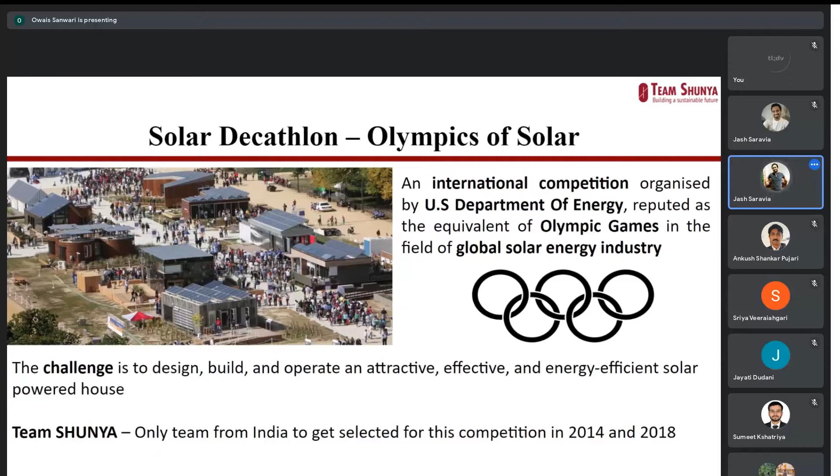Team Shunya has evolved to become a close-knit family of 40 plus students across all departments and courses. The team boasts various technical and non-technical subsystems proficient in innovating and implementing the ideas. Since its birth, the team has participated in international competitions, expos, and conducted various webinars and workshops on sustainable development.

Here we have a brief overview of what the team does during a competition. First, the tech teams employ different software to design, simulate, and analyze the project at every milestone, building it from scratch. The architecture subsystem is responsible for understanding and analyzing resident requirements for design development and analysis, while considering aesthetics.

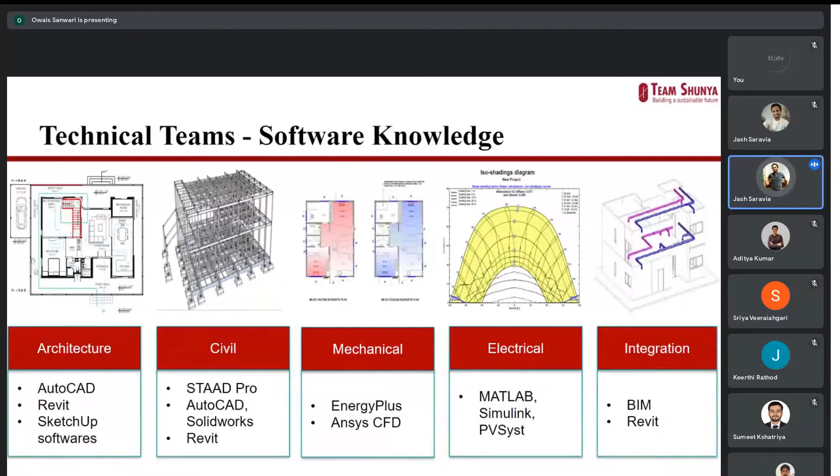It also works on incorporating passive techniques for optimizing energy efficiency into the project plan. The civil subsystem comprises of two internal teams: the structural team, which works on design and safety aspects, and the materials team, which selects efficient materials for the houses.

The mechanical subsystem maintains and optimizes the thermal comfort, regulates heat, airflow, ventilation, air conditioning, and plumbing system of the house. The electrical subsystem deals with electrical requirements of the house, such as energy demands, wiring, and home appliances. It is also responsible for designing the PV system to be deployed for powering the house.

Finally, during integration, a simulation of various subsystems is done using the mentioned software to avoid any conflict while installing the systems on site. Once we are done with the integration, the team undergoes complete construction and safety training to ensure it is ready to build the house.

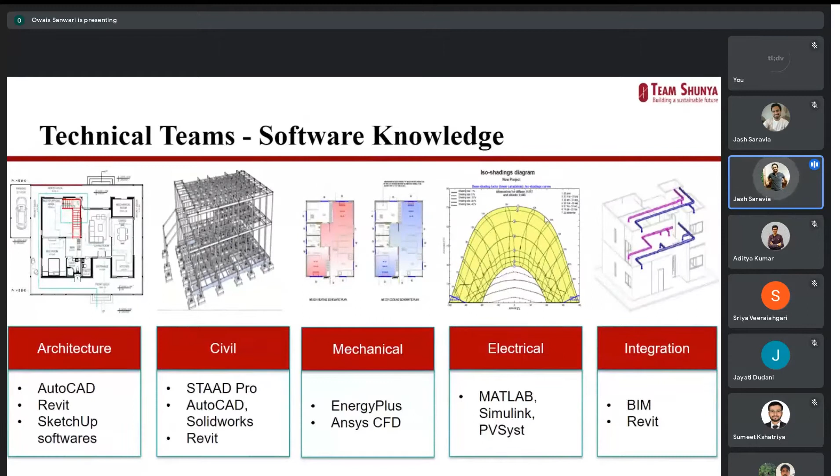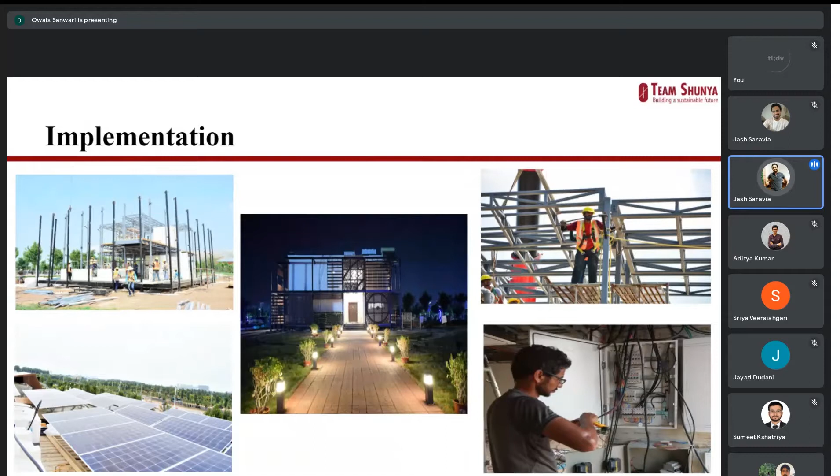Here comes the implementation, which is the best part of the project, as all students are involved in the construction process. All the designs are put to life by the students themselves. All the team members are enthusiastic to learn and actively participate in the project building.

The marketing and communication team carries out many activities throughout the year. We participate in various knowledge exchange programs and have interactions with eminent industries. Moreover, we organize various events like webinars and workshops to increase awareness about sustainability and energy efficient technologies, and increase our outreach through social media pages.

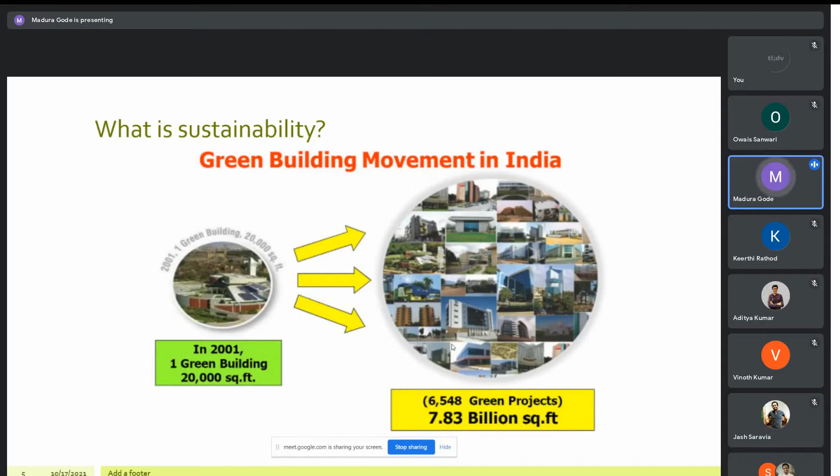Why do we need sustainability? Why do we need a sustainable development?

So first is the demands. Though there's a population rise, that means we need more infrastructure, more housing, and when there is more housing, we need more corridors, more public transport, metros, ports, more infrastructure, more commercial spaces. So that's how the demand is increasing.

But at the same time, what are we losing right now? It's the air quality, the land, the water. We have so few water resources right now. The groundwater table has gone so down that in the next 10 years we need to really search for some option to get at least fresh water to drink.

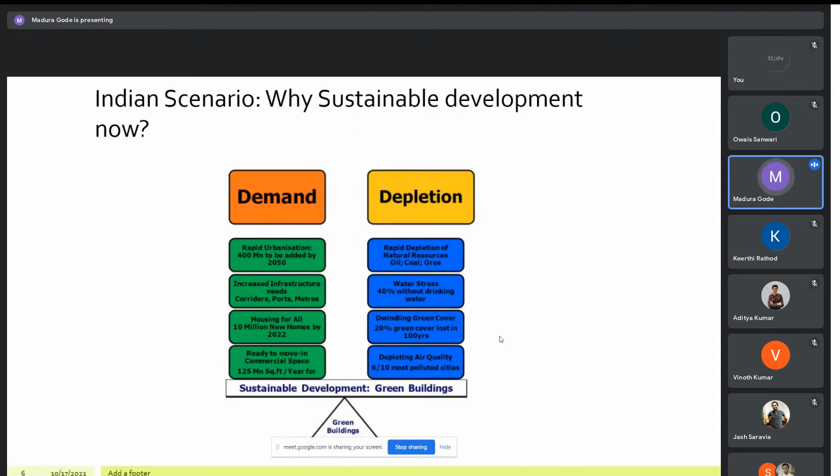So this is the reason why we need to start a sustainable development now. It has already started, but now we need to take it more seriously, and it is going to give us better results.

What is a green building? So a green building is not what actually looks green, but there is much more that goes into a green building than just green. A green building is something which conserves natural resources - if we are using materials which are already available nearby, rather than creating new materials to build a structure, that is what goes first in a green building.

Then the next is it uses less water - the water used for maintenance of the building, the fixtures used, everything counts. Then there's energy optimization - the amount of light required, is it artificially lit, or does it have a huge amount of natural lighting that saves us from using artificial lighting?

It is the one which generates less waste and provides healthier spaces. This is also an important point - the building should be habitable for the people residing in it. It's not just about the environment benefits you are getting, but also the health benefits that a person should be getting.

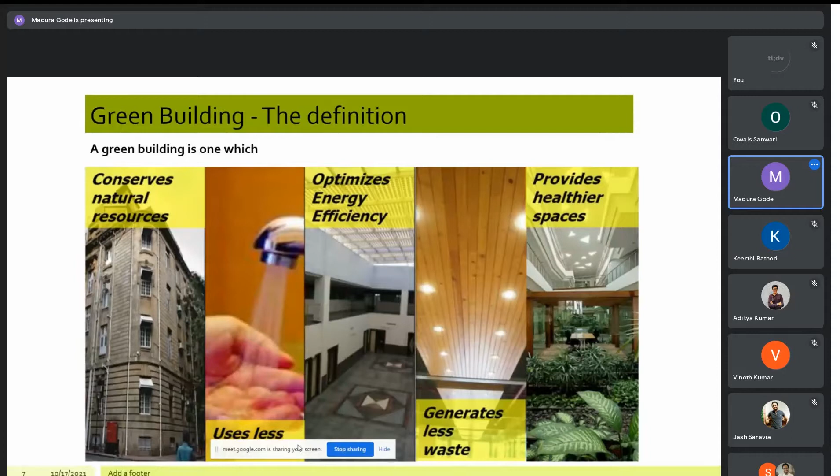Everyone knows there are 5 elements in nature, and India, having a background where we are culturally so rich, the architecture that has gone through history has taken up all these and balanced them in a way that you have seen in the marvels of architecture, the forts, the traditional architecture. It's very rarely that you'd see a fan placed somewhere, or need artificial lighting at places like this.

If you visit an old house with a courtyard, maybe in your native place - there are a few houses I've seen in Kerala as well, and even in Konkan, with courtyards. Why are they there? We have these elements balanced in it - there is an element of earth, we leave some space of earth inside our house as well.

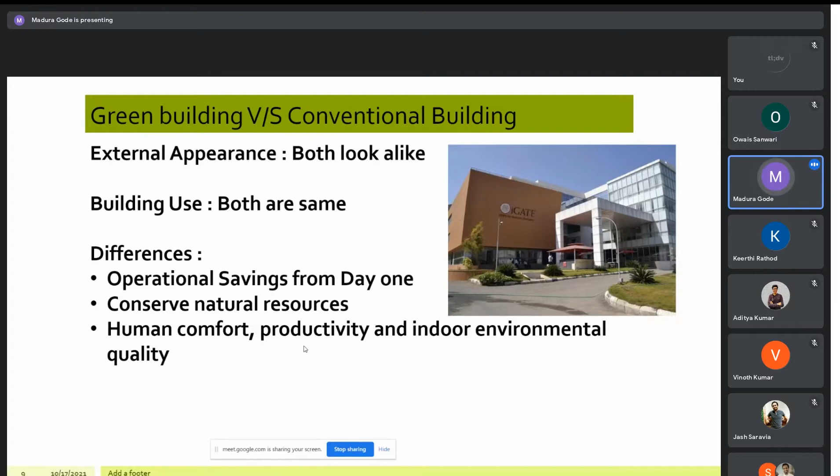Now, this is something that an architect, in combination with the civil engineer and the developer, has to work with, because we need to design something that would give us everything like this.

So what are the benefits of a green building? Why should one go for a green building and not a conventional one? First is the operating cost, which we just talked about - you have a chance to save your energy bills up to 30 to 50%.

Now, this is huge - like getting discounts when there's a sale or an offer, you get huge discounts and get pepped up, like 'I want to buy this, maybe this is the time.' It's something like that - energy savings and water savings are a huge incentive to go for a green building. There are many other incentives as well, but these are the tangible ones you can count.

And why won't anyone like to save their energy? When economy as a factor comes in, that is when you actually start counting.

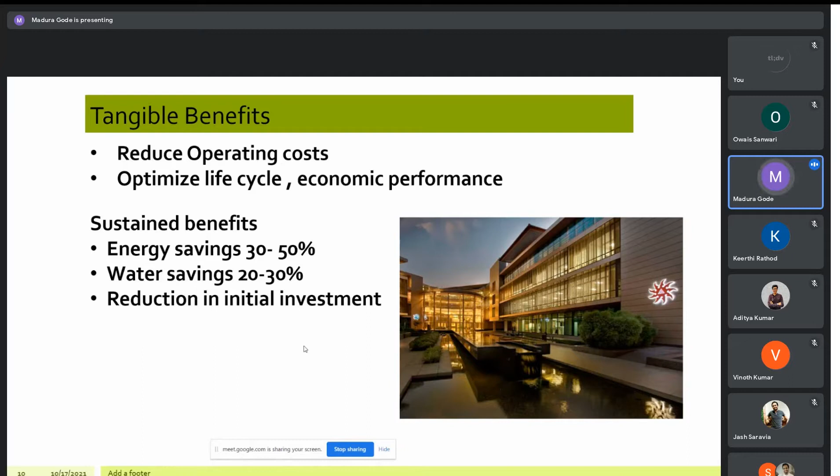And this is where it shows. So these are a few benefits, and here these are a few intangible benefits. You may not be able to count them, but then you will be able to feel them as well.

So here you actually get indoor air quality. So would you like to stay at a place which is most of the time artificially ventilated, or would you like to stay at a place for a longer time where it is naturally ventilated, where you get a nice combination of artificial and natural as well at times? I think one would prefer to have a combination of artificial and natural, or natural, than just being in an artificially ventilated space.

Yes, because that improves our productivity, that gives us a connection to nature, to the outside world. Staying at a place for a longer time where we don't feel the connect outside, we don't see the sun, we don't see the environment outside, we don't see the nature outside. It may be anything - the amount of buildings that are outside, or the sky that is outside - we don't feel the connect of the entire day.

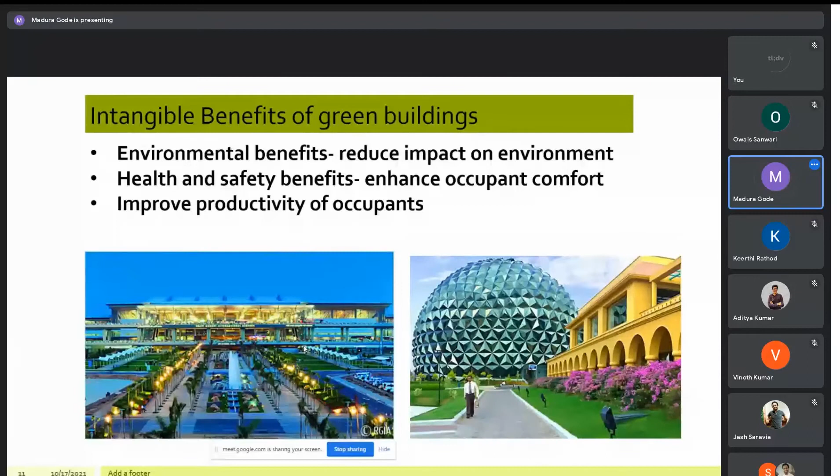So why don't people go for green buildings if there are so many benefits? One reason, I would say, is the initial building cost is a little higher, but we'll talk about this in a further slide. So this is one reason why people think, no, the initial cost for construction is higher than a conventional building, so I'll go for a conventional building.

But the incremental cost, which comes with the maintenance of a conventional building, is always higher than the cost of a green building. That is something, that is a calculation one should definitely do.

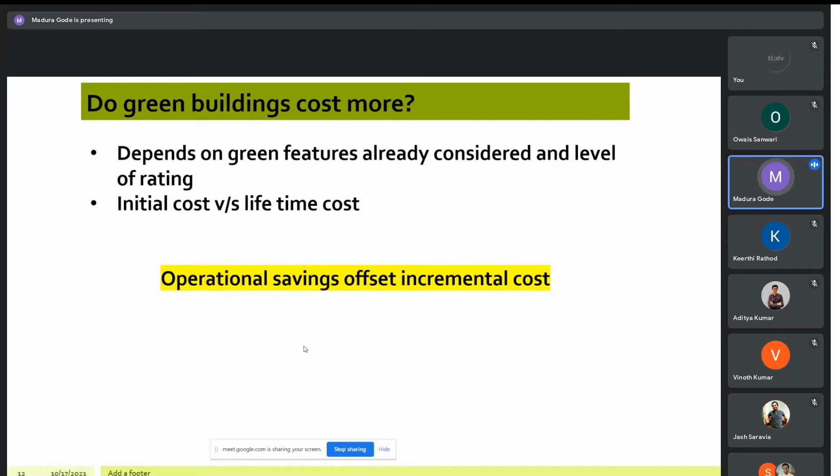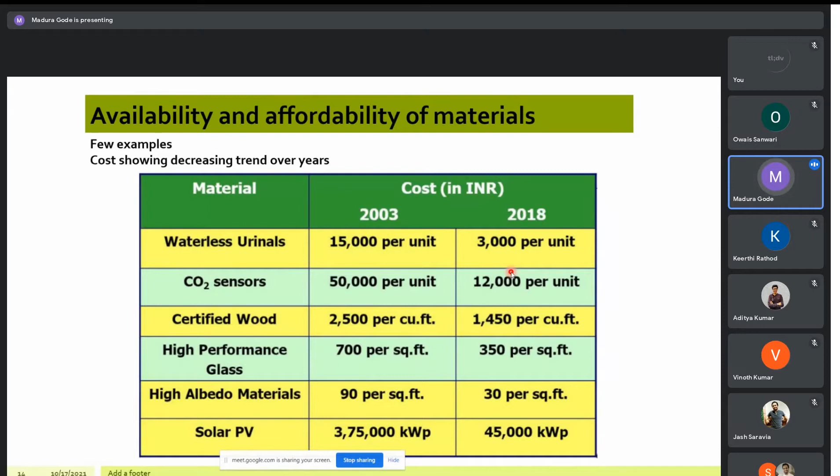I'll come to the developers part as well. But yes, for our environment, it's a very, very good thing.

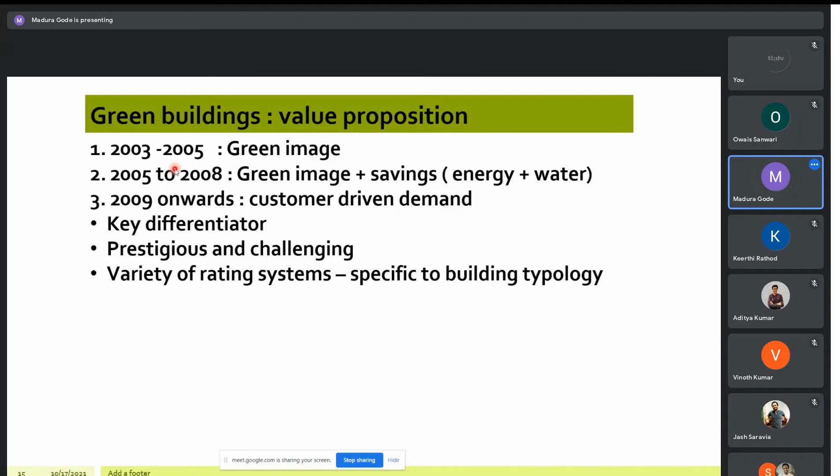And that is what is important right now, to get the sustainability factor in India. What did green buildings do differently? The demands are the same - if I need 5 liters of water a day, another person is also going to need the same. So what is the difference?

It's basic maths - this is the basic maths that goes in when a green building is made. The light fixtures are something which are taken care of. The HVAC is something that is taken care of. How is it taken care of?

So for fixtures, as I think all of us know, there was a time when we used to use CFLs, then we switched to LEDs. Before that, we used to have filament bulbs, filament lights. Now that we are exploring new methods to save energy as well as give maximum output, we are saving on this.

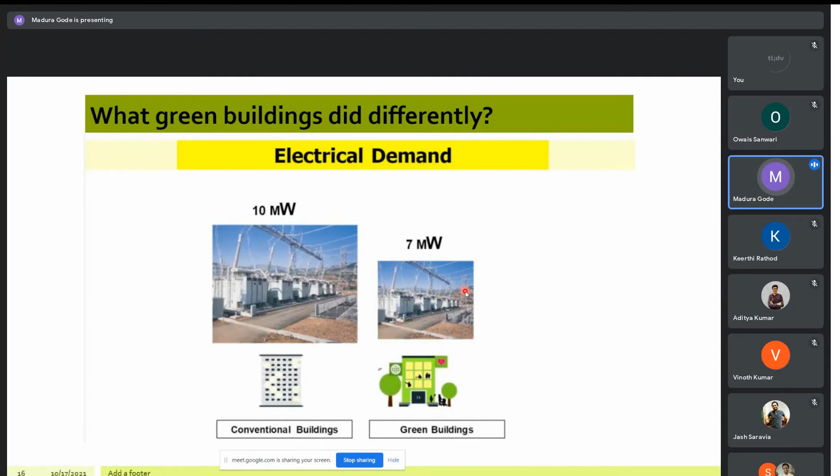Now light is one aspect, HVAC is another. Once you design a building which requires less artificial ventilation, you have open spaces, you don't have long spaces where one definitely needs artificial ventilation due to blocked spaces. We design spaces which can be naturally ventilated, which won't require long pipes to get fresh air. That is how we save.

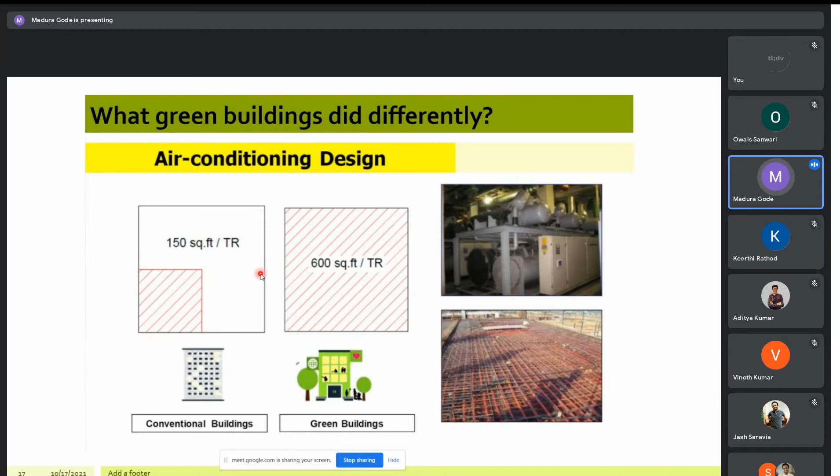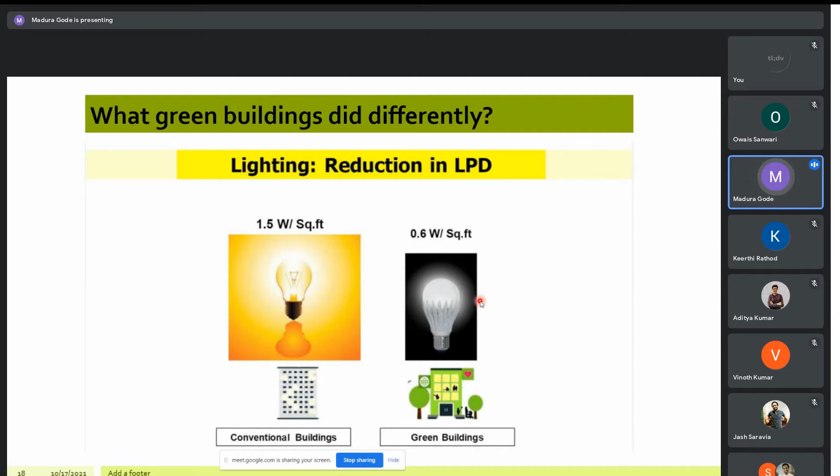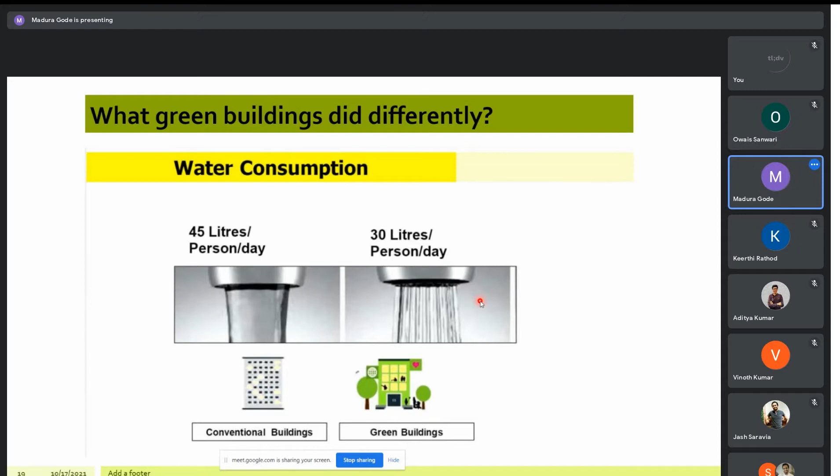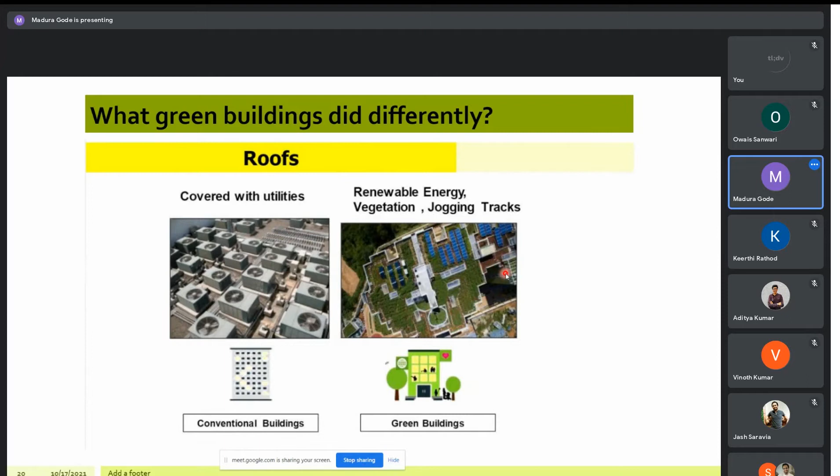Now, the question is, there are so many types of buildings - how do we rate them? If I want to rate a bungalow as well as a commercial complex, both requirements are different. So there are different rating systems. There are 28 building typologies that we go through, we refer to those, and that's how the ratings are done.

And these are a few standard baselines of ratings. There's NBC, from where we have guidelines for building structures. Then there is ECBC, RECs, the Uniform Plumbing Code of India. We already have all these set - all we need to do is go through them and choose sustainability.

You must have seen a few buildings, or there could be a few buildings that you might have visited and noticed. I visited this building, which is a commercial complex at Seawoods. It is a platinum rated building. So what they have done is they have marketed this building with an IGBC platinum rating in their entryway. This adds on to their own prestige as well.

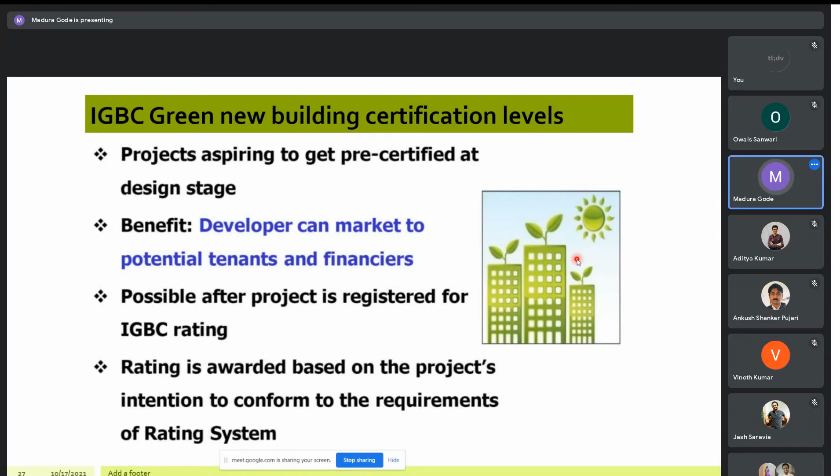Another reason is pre-certification. If a building is in the designing stage and you get it pre-certified, you're saying: I'm making a green building, please give me a certificate. So in simple language, this is how you get a pre-certificate. And with that pre-certificate, you get many other benefits from the government which you won't get otherwise. This is the profit that developers, tenants, and financiers can get.

After the building is completed, you go for the final certification. This pre-certification process has to be updated every 6 months. It's not that you get a pre-certificate and then just enjoy the benefits. No, you get the pre-certificate, and after every 6 months you have to show that you're working along the same lines of a green building, to ensure you are going to make this structure a green building every 6 months until you finish the project.

Now this is a flow chart of how you get the IGBC certification. So here you register at this website, then you submit the documents, and then there is a third party assessor who comes for a review, and the review is done at the place and submitted to the project team with the IGBC for the final review.

If they verify, then they verify it in the next 30 days and announce the rating. And if you happen to not like the rating, which is equally possible - there's a chance you think something you've done isn't rated properly - you can ask for a re-evaluation within 30 days of the announcement of the rating.

So that would again go for re-evaluation with the IGBC team, and they would re-evaluate with another assessor, another person who has reviewed it. So there is no chance of having discrepancies. This whole process takes about 2 months, or about 3 months if there is a re-evaluation.

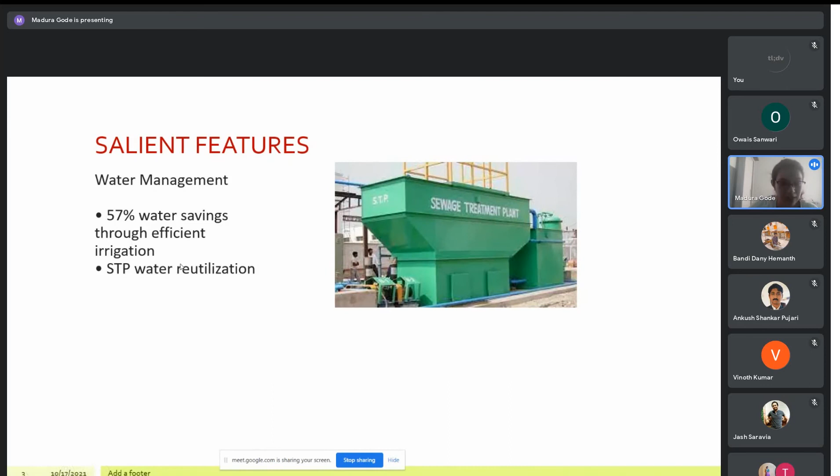It is around 1 million square feet, and it holds a seating capacity of about 10,000 people. So these are a few overviews of what they have used here - they are saving 57% of water through efficient irrigation, and there is STP water reutilization being done at the site. There is also energy efficiency.

They are using a solar PV system on the roof. Then the building envelope also plays a major role - the glass that has been used is something which would reduce heat gain inside the building. As you can see, many glass facades are used, but then the room heats up, and that's how we need a more efficient HVAC, and then the energy all goes into artificial ventilation. That's how we waste our energy. But when we use facades which won't heat up the interiors of a room, we save on artificial ventilation.

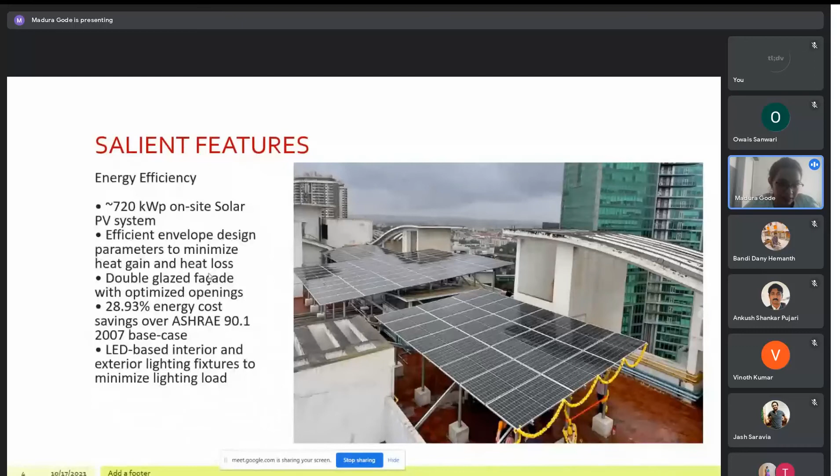And they have used LED based interior lightings. Then there's resource management - what goes into resource is one, the resource needed to construct the building, and another, the waste generated after the building is constructed. 80% of the construction waste was managed on site. As I said earlier, it's not just about the materials that go into the building, but the waste generated, and how it is disposed of. It has to be an end-to-end process.

So when there is waste - glass waste, unused cement waste, or waste of mortars and bricks - these are used again on the site itself in bits and pieces, so that you don't need to cut new material for that. This is something the PMC does - this is project management, so that's how one has to even manage the project. You can see that the role of the designer is first to design the building.

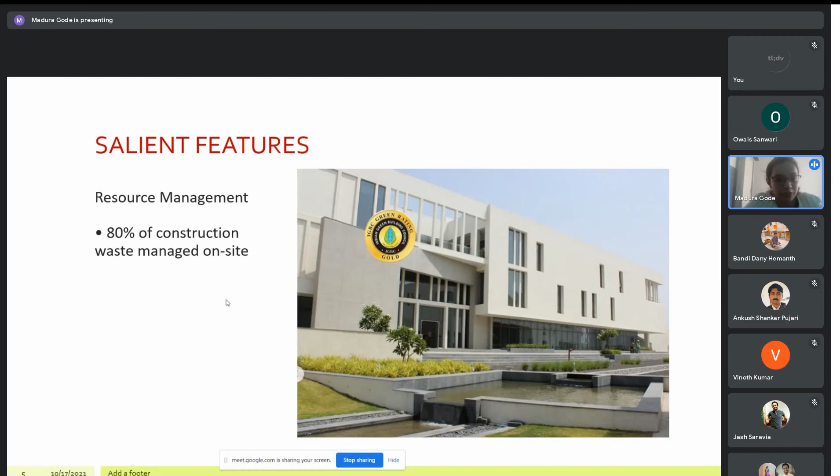Then even to design, then the developer who is going to invest in it. Then comes the person who is going to help in constructing it. Then there's always the structural engineers who make it possible. Then, while constructing it, there are the project managers who take care of these things on site, like the construction waste, how it is managed. It is because of these people. So it is a collaborative effort of all these sectors together. I may have missed out a sector, but these are the major sectors, and all of the efforts go into making this possible.

These are a few other pictures. Now this is again the housing. So we are still coming up with this sector in housing. We have seen many in commercial, as we saw in the previous example. So this is a Tata housing at Bangalore. It is a platinum rated building.

Water management is something major here. These are the major features. Basically there are kinds of flows that we get in water fixtures as well. There's aerating flow, there is laminar flow. So this is how you basically choose your fixtures as well. It can reduce up to 20 to 30% of your water consumption.

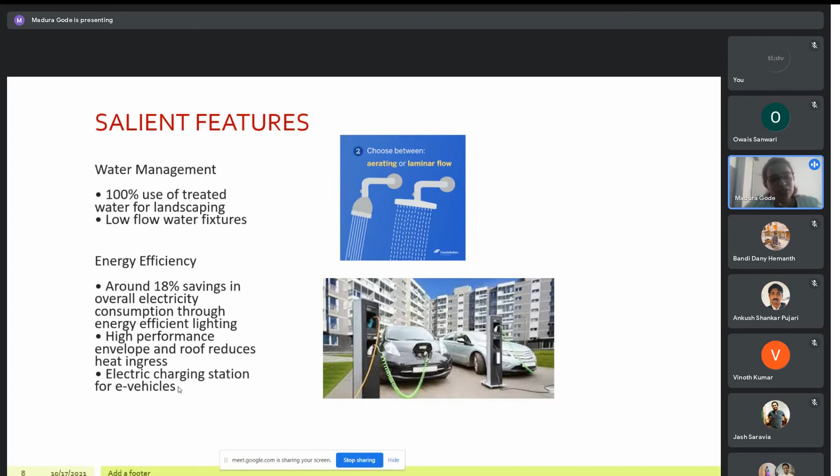And 100% of the treated water, the water that comes from the STP, is used for irrigation, for the landscape irrigation. Now, energy efficiency: there is 18% savings on overall electric bills, for the bills which are there in the corridor spaces, the entryways, hallways. And there are electric charging stations. Yes, India is now coming up with EVs. That will definitely take some time, but yes, it is coming up. So even these are considered, and the provision is already made for them. Now, how far that will go, but yes, the provision is made.

Then there's resource management. As I said, how you retain the site is also important. So 26% of the natural topography—if there is a hill at the site, how do you use the hill without having to cut it or flatten the entire land? Because even that counts. If you maintain that kind of topography, the kind of levels, the kind of depth, if the site is a little deep, then the road level or something, how do you manage that without disturbing the levels much?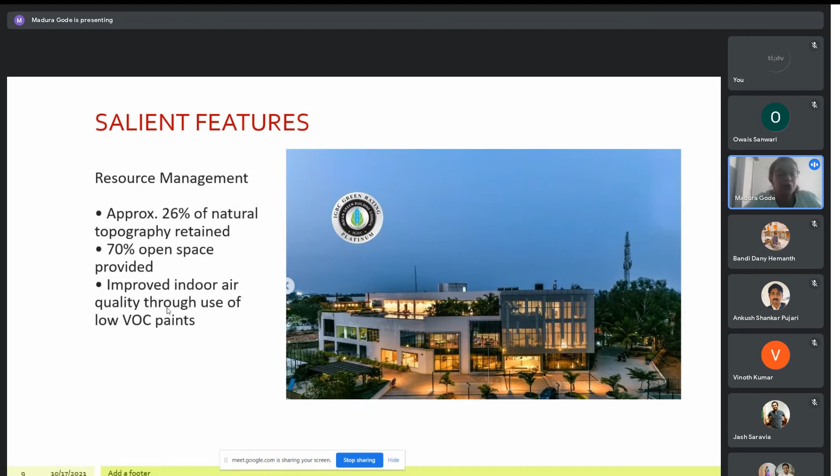So that is counted. 70% of the area is provided as open space, and low VOC paints are used. Most of the times when painting work is done at our homes, at times you get a smell, which for some people is actually an allergic smell. In the longer run, it becomes a problem. We don't recognize it, we don't realize it, but it also affects our health to a greater extent. So use of low VOC paint is also something very important.

These are a few photographs of the same site. As you see, it looks like a normal building, like a normal conventional building. But how it operates is what makes it a green building.

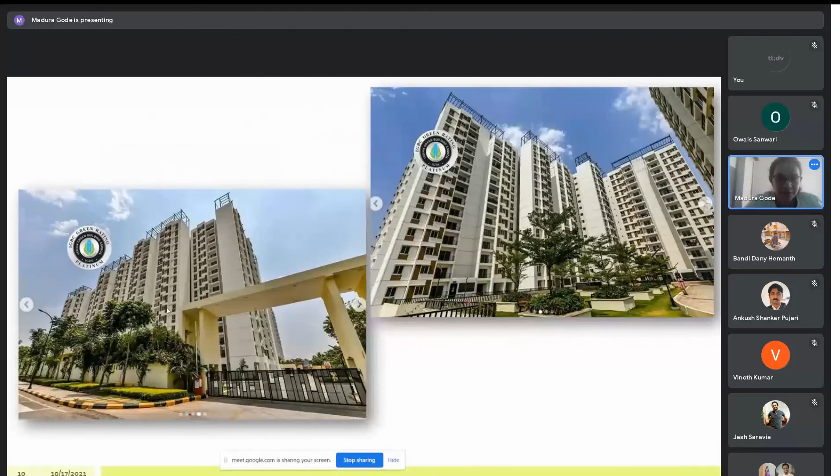So this is where I end my presentation. And I would like to know if anyone has any questions, any doubts, and anything to say.

Aren't there any questions? Yes. So in a previous section, you explained about the certification process and pre-approval before the design, or in the design phase itself. So while designing, are there any specific considerations which we will have to follow so that while applying we will get that certification, or will they just check for the values at the end?

So yes, there are specific constraints that one has to follow. Thank you for the question. So the constraints depend upon 28 parameters. So let me just present it.

So as you can see, for pre-certification—for example, if there is a new commercial building which is coming up and it's in the design phase, there are a few parameters which are written inside this itself. So the amount of energy that it should be using, it starts from the land: how much land are you conserving, what is the topography that you're maintaining.

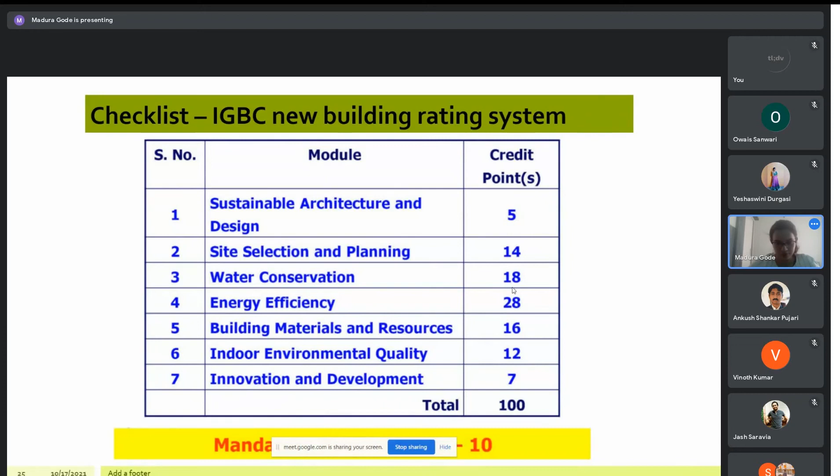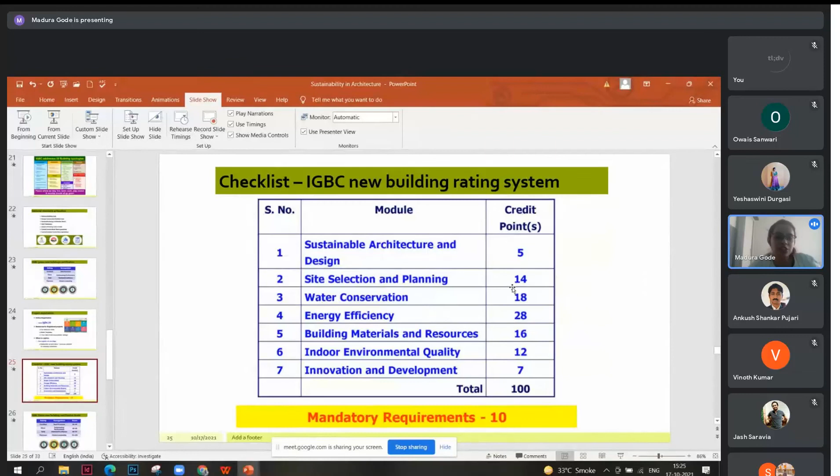Those are the constraints you have to work upon when you go for pre-certification, and this is the benefit you get - you are designing and can cross-check then and there whether it's meeting the constraint or requirement, and rework it. Then you have a higher possibility to get a platinum rating, which is lower when the building is already made and you need to rework it. So it's a little more challenging - not impossible, but definitely more challenging when the structure is already made.

Yes, so did my answer solve the question, solve it out?

So there is some sort of rule book which defines - we get some specific points, and based on that we decide which points we have to earn, and file the certificate for the certification. Yes, absolutely. There are 28 such rule books available for each different category of buildings.

How can we get further group invites, do you have any groups for this? Sorry, can you repeat the question? This is not related to technical - I'm asking, is there any further meeting invites, how can we get that, or do you have any groups?